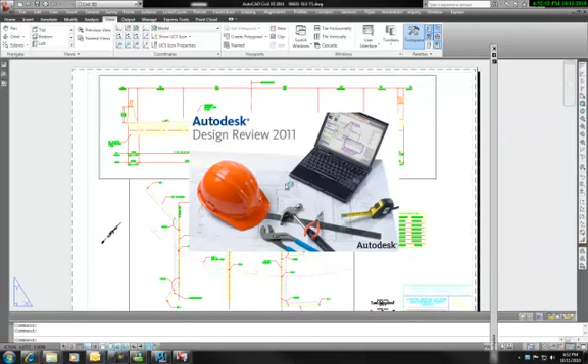The markup software is called Design Review, and I'm going to open this now so that you can see the markup aspect of this. Design Review 2011 is a free product that comes with your AutoCAD product. It also could be downloaded from Autodesk's website for free. They will require you to put in an email address. That's it.

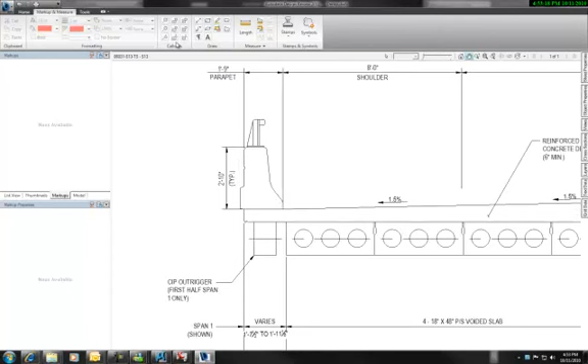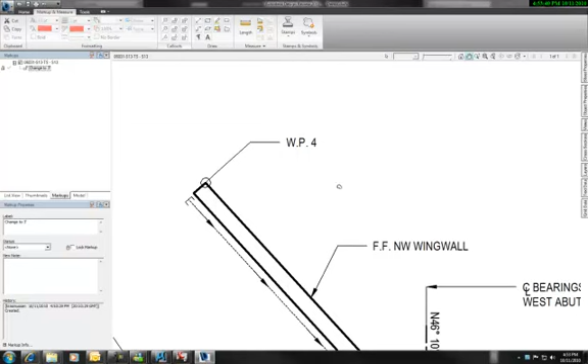For this demonstration, I'm going to do just a quick markup. Maybe circle this area, and we want to say change to 3 feet. Maybe I come in, make another change here, and I'll mark this up. Say change to WP5.

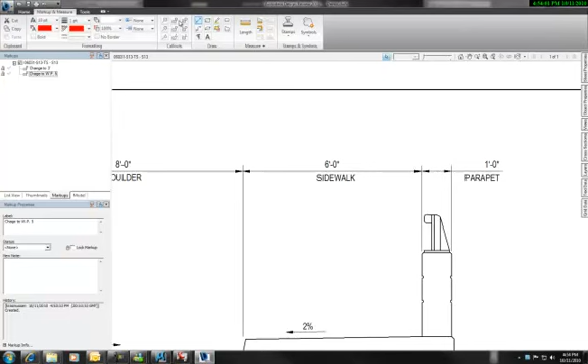Let's do one more markup. Now these markups could be on multiple pages, but for this demonstration I'm only going to do it to one page. 7 foot.

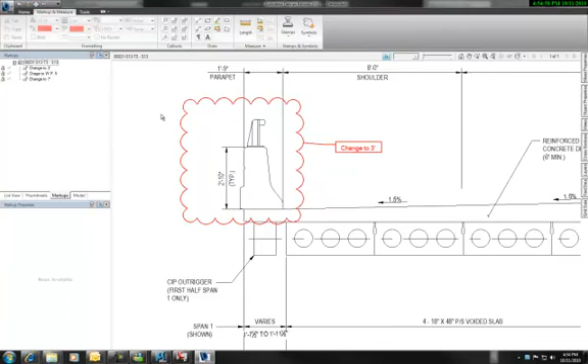Okay, now that I've marked this up, I would save this and resend it back. So what I'm going to do is save this back in the location that it was, and I would email this back to the person that's going to do these edits for me.

Now I'm the person on the other side. I just received the markups, and now I want to attach them to my drawing. Now the Sheet Set Manager is something we covered, but today I want to show you the markup set. The Markup Set Manager is located under your View, Palettes, and right here it's also Control 7.

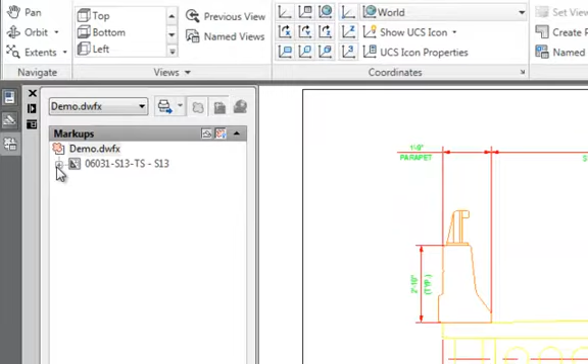I have it on the side here. I'm going to open the file that was emailed back to me. I'm now the CAD guy getting ready to do these markups. You notice when I attach it here, we see the sheet, the one sheet, and we have our 3 comments. If I double click on this, it says change to 3 foot.

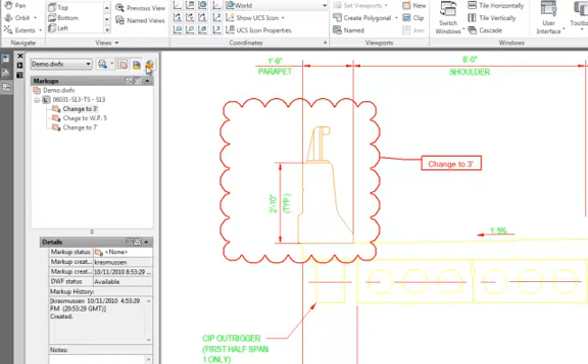When I double click, it will actually bring it into my drawing and put the markup right over top. You can use these icons here to switch your markup off, turn it back on, switch between the DWG file, which is what we have here with the markup on top, or you could see the DWF version so that you could see it in the black and white or whatever rendering that it was set to.

I would then make this change. Let's say that I changed that to 3 feet. Now I would come into this markup, and I would say markup status for review, because I would want the guy to check my work.

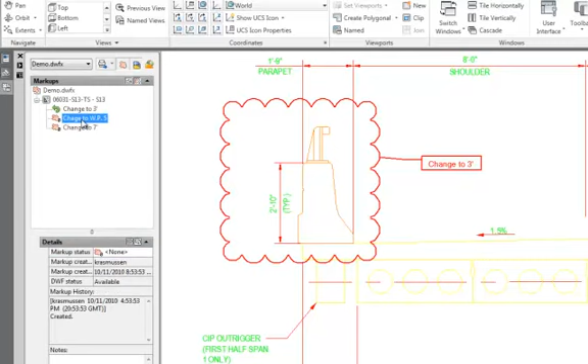I'll then go to this WP5. I see this change here. I would go in and change this to working point 5. Then I would come in and say for review, and then change to 7 foot. As I double click that, we see that that changes over here.

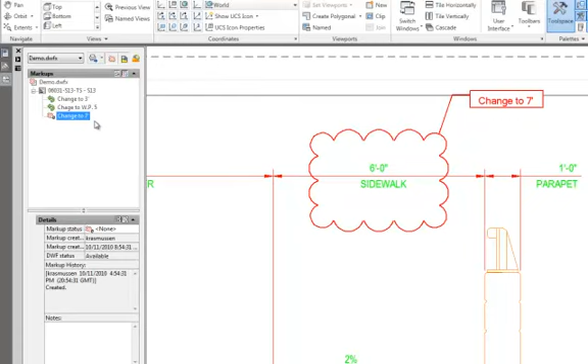But I have a question. I want to know if that should be done to both sides of the road. So I'm going to change this to question, and down in my notes I'm going to say both sides. I'm now going to right click on this and say save markup history changes. This will now save those changes.

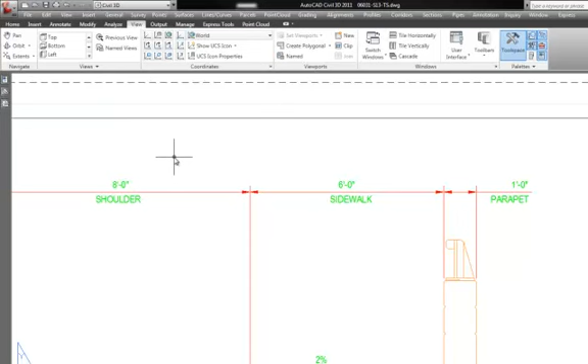I would then email this back to. Now on the other end, the person that originally marked it up would have these comments back. As with the CAD drawing, I could double click on it and zoom to it. I see that it's for review.

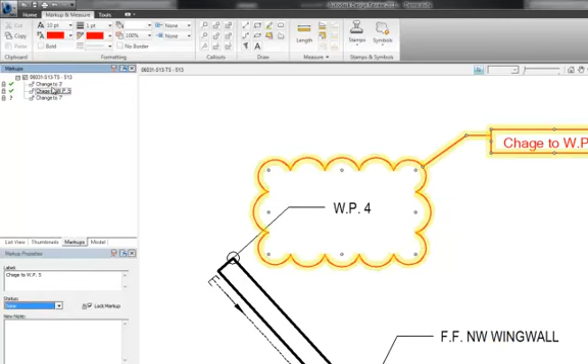Let's just say that this was changed to 3 feet. I would say done. I would then proceed to the next one, working point 5. Let's say that I did change that. I would say done. And then the next one says change to 7, and it says status question.

Down below here we can see the date and time that somebody asked to change it to question, and the question says both sides, as we could see right here. You could then answer the question, say yes, send the markup back.

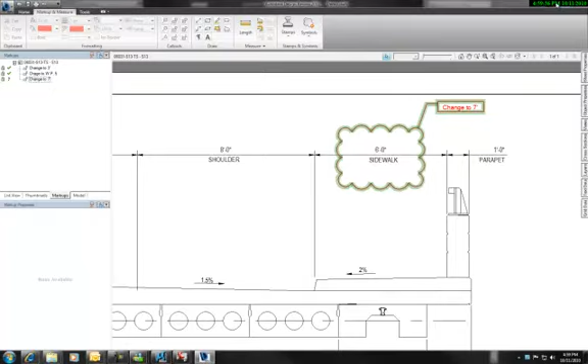I'm not going to go through that for this demonstration, but my main purpose was to show you that these markups can actually be overlaid right onto your drawing, and it's the method of using the Markup Set Manager. This concludes my demonstration for Markup Set Manager. Thank you.